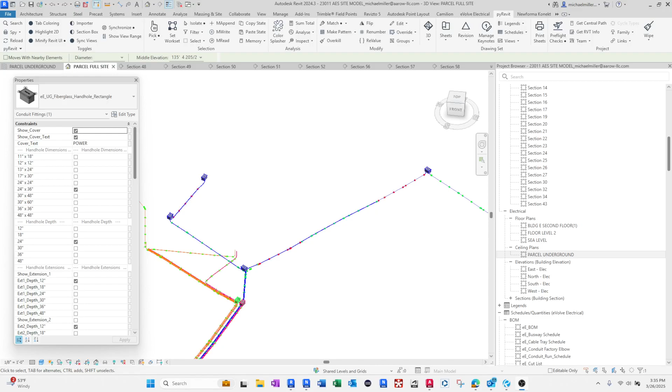Gonna make a quick recording of what we got done so far. This is the 107, 127 area. Looking at it right here.

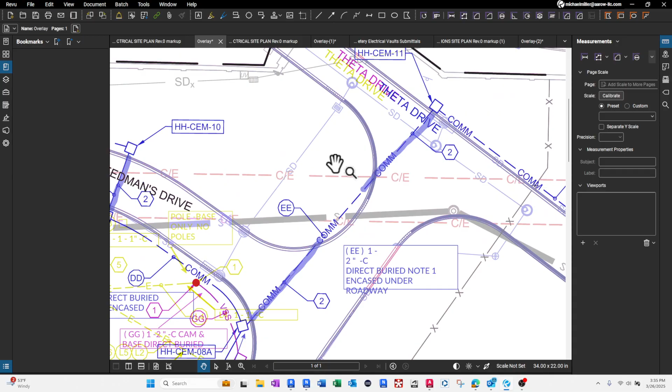This is done to this handhole, crosses here. We have this moved over to right around here, and that's because of CU.

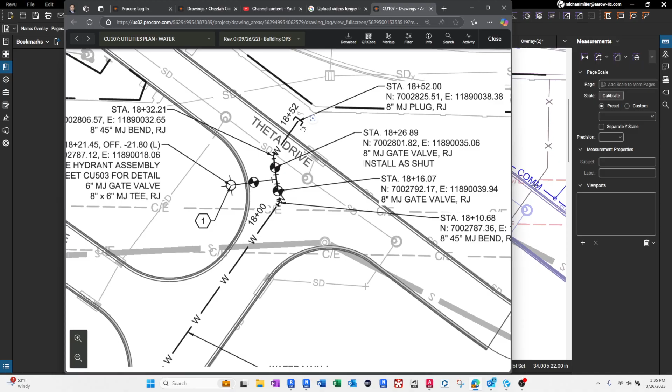In that same area, they got all this, and a fire hydrant. So that has been shifted over to right here.

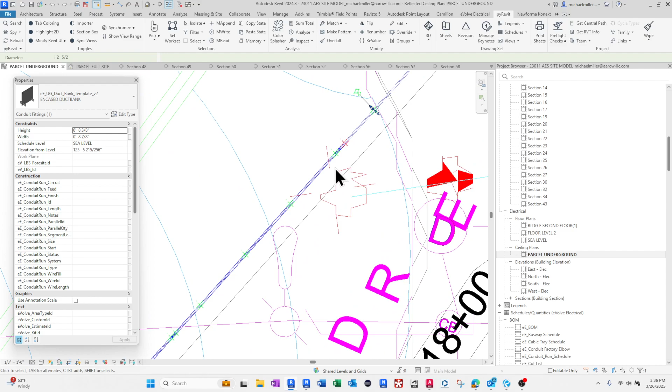Missing that. Now when it's crossing a road, it's going to be red, and then it's going to be green for direct burial. And so on there. This is back to that handhole area, so these are those handholes located here.

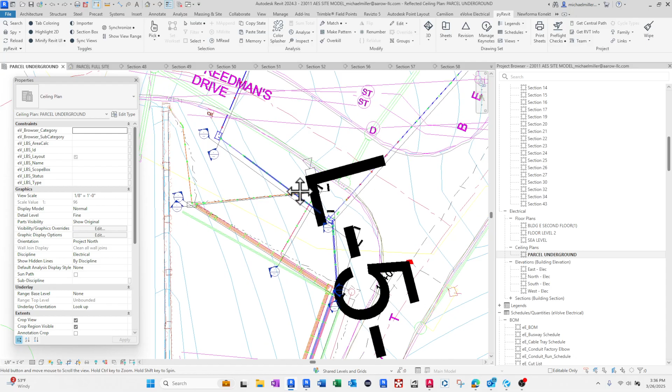Pop up. Need to finish this, actually I didn't do that. I just saw that, here. I gotta finish that right there. Here's the, can't see them.

The VSS is right here, box and the power box. This is where the panel's located. This power goes out to this camera.

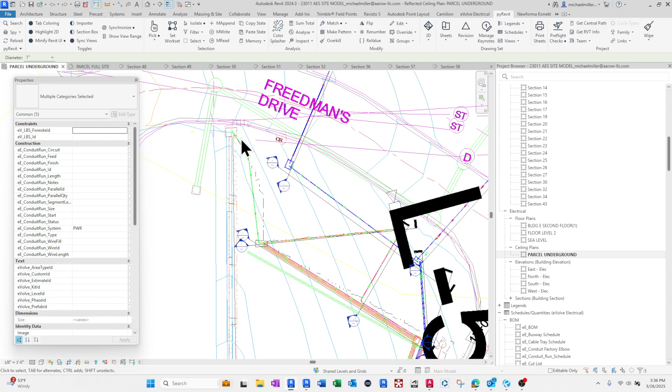Then we have this running to the camera as well for VSS, and then power over here. And then we can see that now over here. Looks like this, it's what you've been seeing already.

Come across the road twice. Up here, goes across the road, red. Handhole, powered, panel, power to security cam. VSS is magenta. If you haven't caught on yet, blue is comm, orange is power.

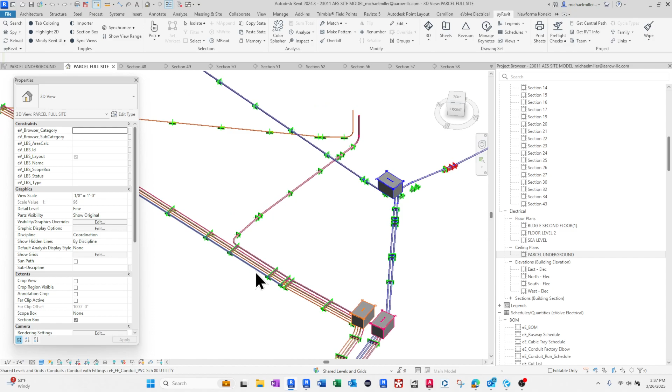It goes for the boxes too, and these are labeled power and then whatever their number is. We have green throughout here because it's direct burial.

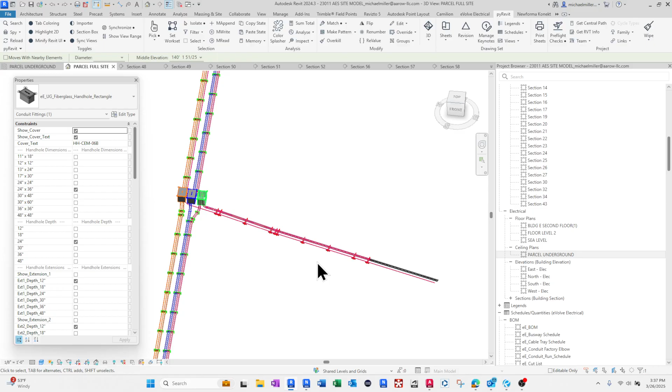These go down all the way, and they hit these. This is where some camera and power goes out, and come back. Comm just hits this and keeps rolling.

Now they don't have that shown on here like that. They have it shown coming down here and they just kind of have a mess, but I have them together and I kept them in order.

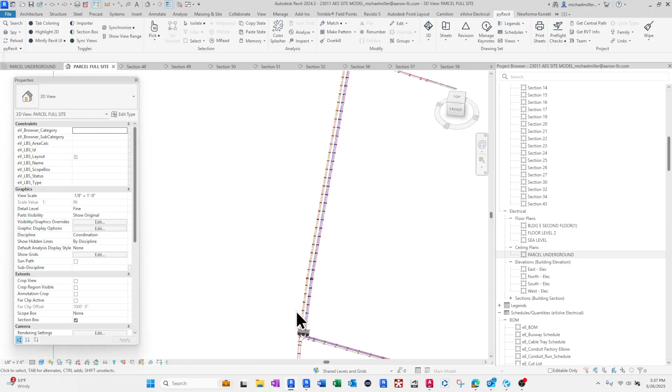And lastly, after that one, we come all the way down here again. Now we have everything going: video, comm, power, and then large 2-inch. And then we have the two 1-inch and the video feed to the security camera down here.

Right here, here's the security camera, here's the video feed, and here's the power.

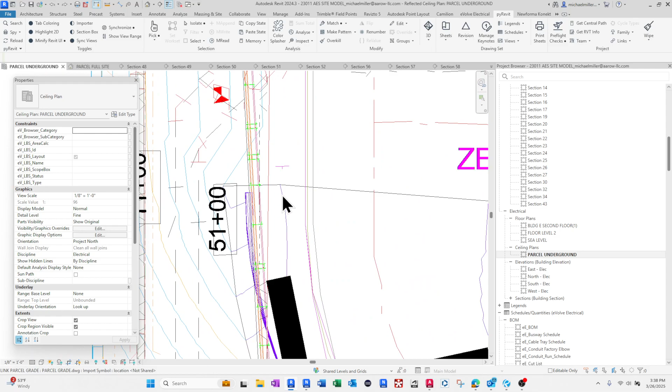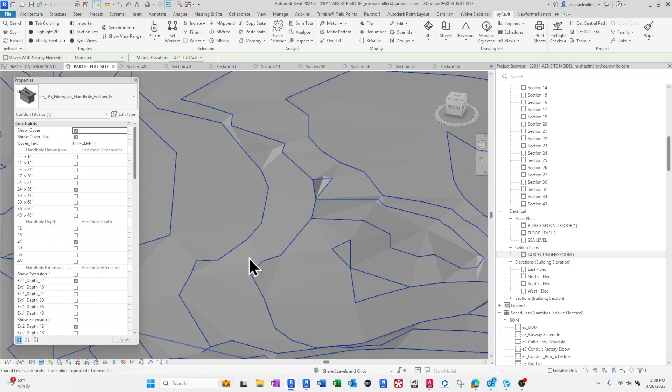Looking at that area again as a full, we can turn on the topography that we have made with the file they gave us for grade. And as you can see, handhole across the road, handhole up here, handhole comm, all comm.

Here's a stub up for power, and if I click this you'll see it underground: the comm, power, video. Here's where we came all the way down.

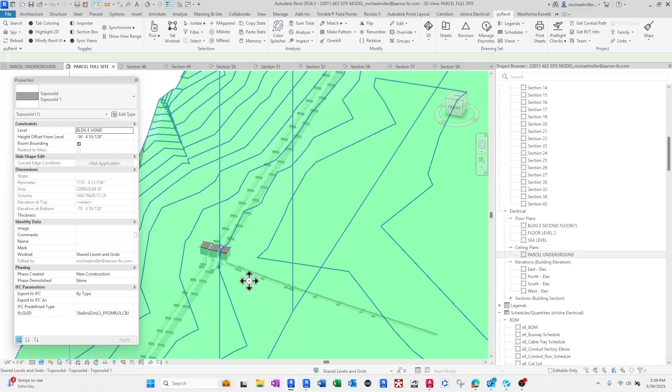Hit these handholes, cut across here, hit these handholes, comm comes out with them here, and then we have a stub up for the video, which these will get tighter, but I kept them separated with that 1 foot separation.

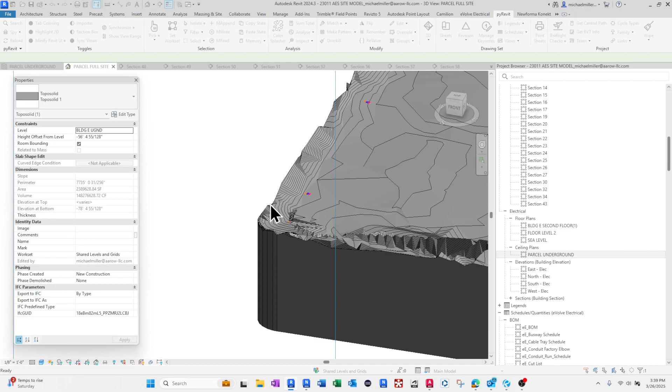I'm going to turn this off again. We'll cut across here, we have magenta for video and blue for comm. We have them coming all the way over here, hitting these.

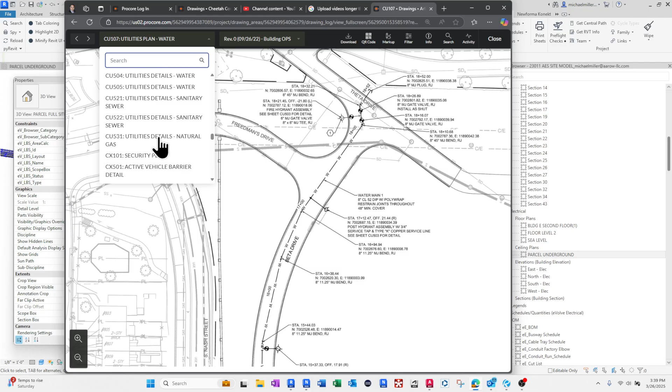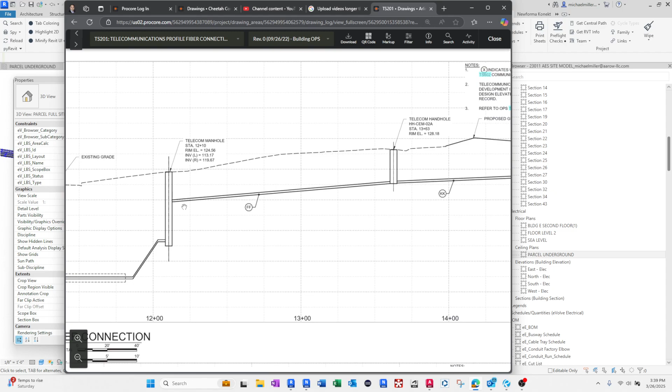Now these have actual elevations. So this is when it comes out and hits this. This is the manhole here, it looks at about 120-ish.

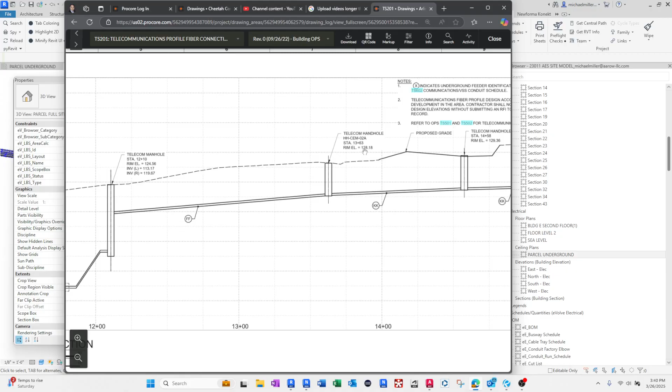And then it comes up to this handhole. It shows super deep handhole, but it's really only 2 foot deep, and it's at 128.18, just to show you. We have this at 128 foot 2, it's put in at that same thing.

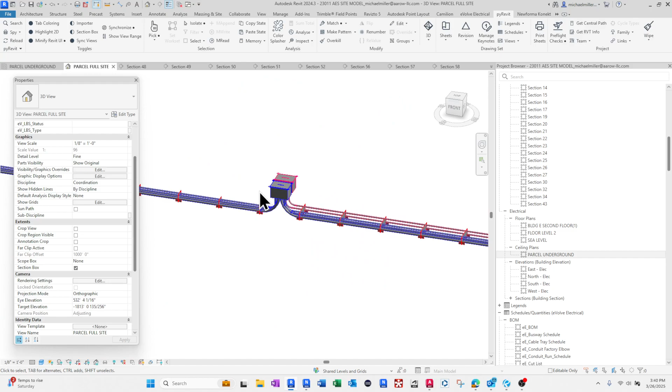Fix that. Alright, comes up here, hits those, video stays, comm keeps rolling, through here. Here we have a road. Show you that same route.

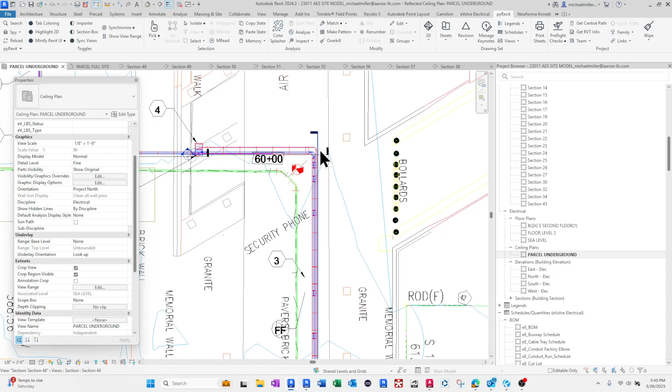Here's the monument here, here's the bollards coming through here. We wrap around, you can actually see the water pipe with this a little bit.

It gets really skewed when you try to bring CAD in here and it's a really big file like that, really far away, it just doesn't show up right. That's why it looks like this. Anyways, wrap around this corner.

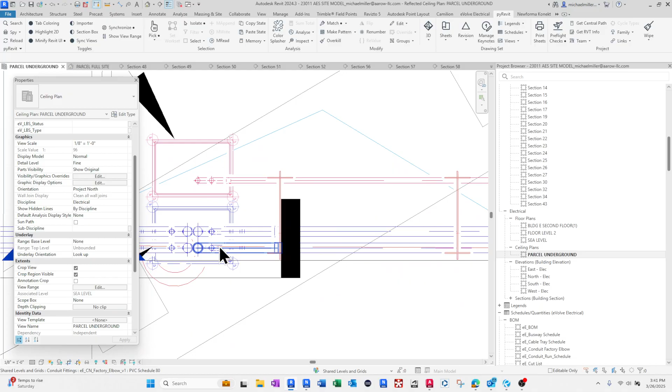Hit this, hit these, and then comm keeps on rolling, rolling up here, hits here. Follow the contract, goes over here, comes down and hits right here.

I thought about doing this straight right here, but I'm going to do what they tell me to do in the drawings because I don't know if they wanted to bring future or something through here again. So these also correspond to, there's a road right here.

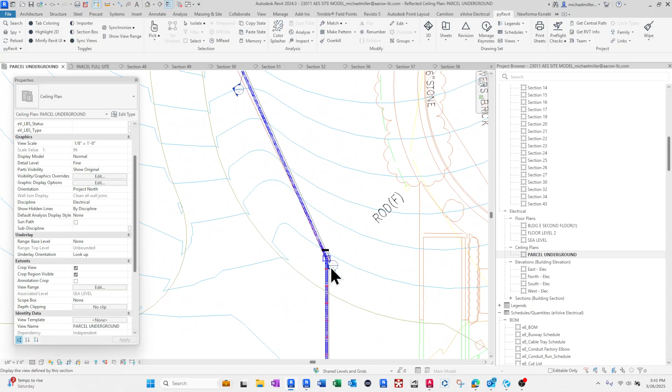Epsilon Drive comes through here. So you have the red going across for encased.

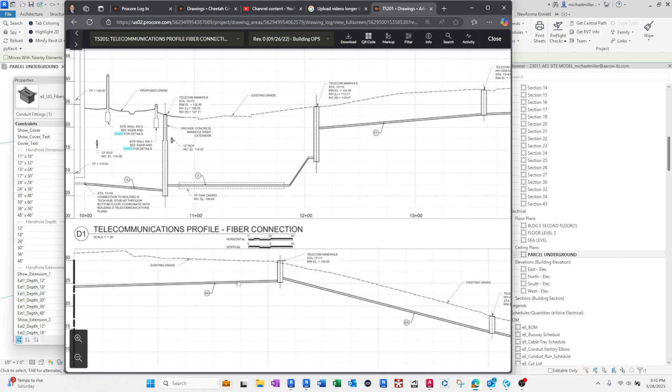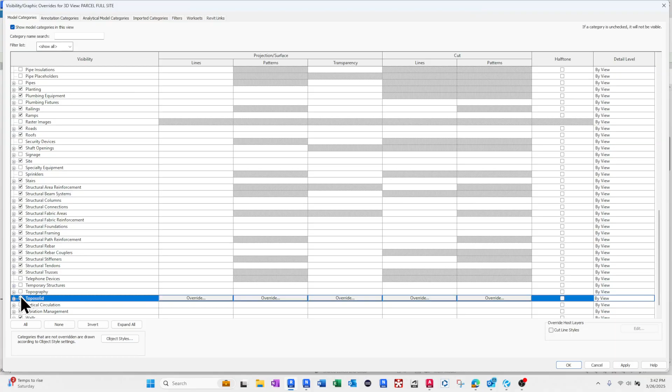This didn't have a name, but I put it as 17 plus 11 comm handhole because it was labeled so on here, 17 plus 11, and then 129.9, which it's 130 on here because if you look at this with the topography on, you will see it's barely shown. So 130 works.

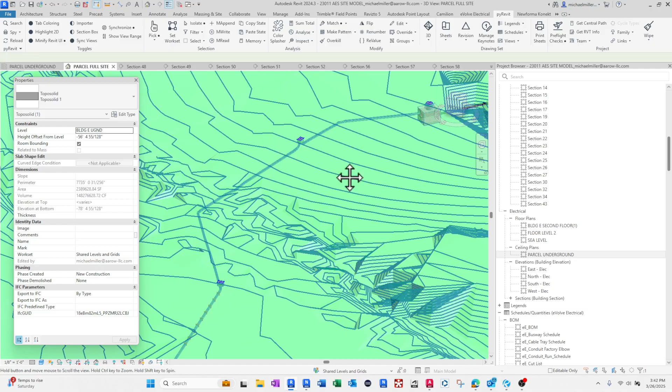As you can see, we're going from here to here next. And you see the route here. And then now we're going to here, which is the manhole. Shows us coming in top, exiting the bottom. The top, at the bottom.

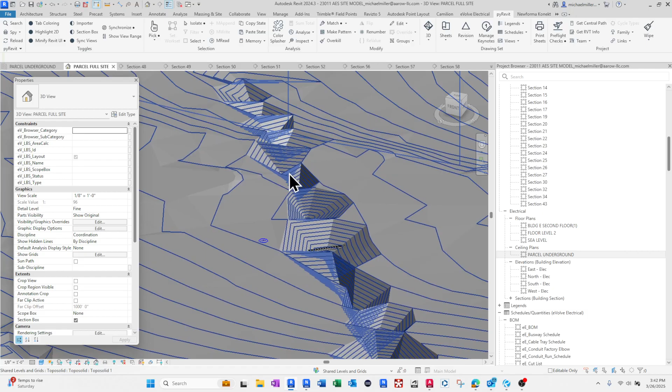I don't think these are real. I don't think they're really like this. So I'm not dipping that down for that run. As you can see, I'm coming out the bottom, but I don't think that's shown accurately.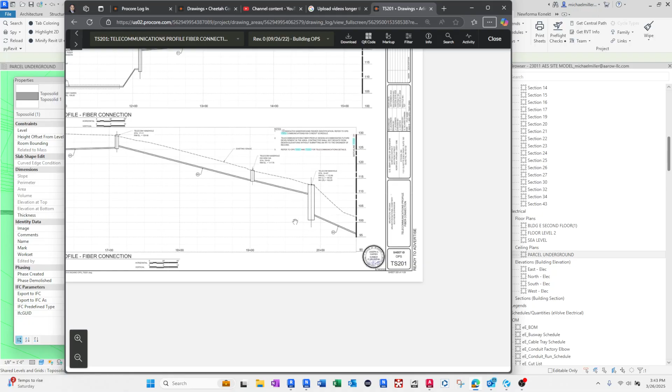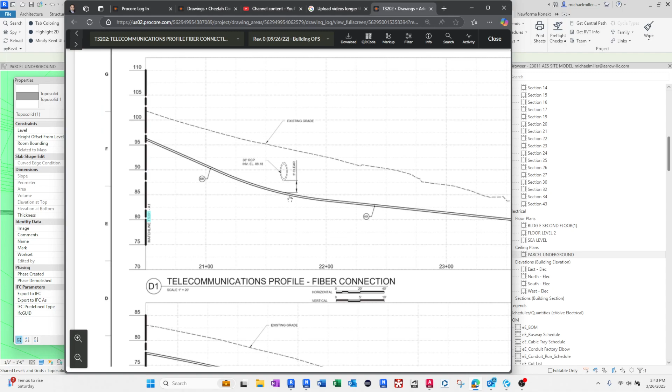This run comes downhill. Now this looks funky, agreed. But if you look at this next run here, this shows us coming downhill and finding a point at 88.18. So it looks like we need to be at like 85 to the top.

So that's a pretty big dip because we're not going to dig that deep this whole way. So our run more looks like this and then dips down and then back up. So that's what that is, which you can see here.

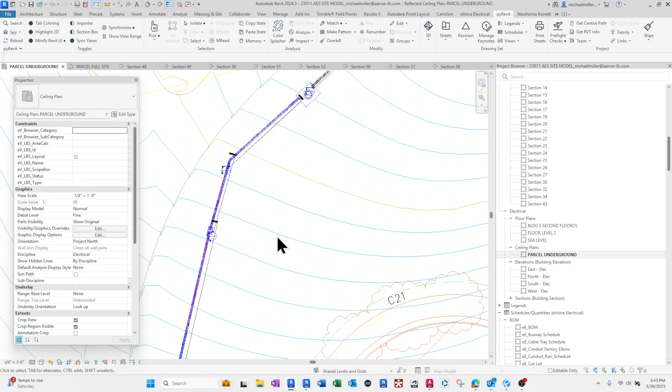And my guess to where that is, this run right here. This crossing. As you can see here. I don't know where that is actually.

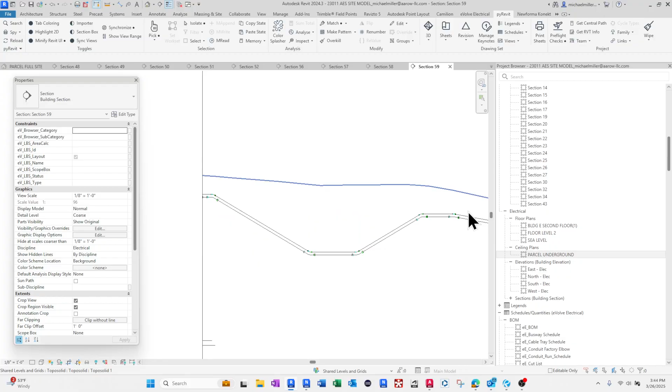Dip, back up. Can't go above it, it'll be too high. See, at the top we have it at almost 85 foot. So that keeps us definitely clear, as I'm using this dotted line as reference, 85. So we're going to take a dip right here and back up.

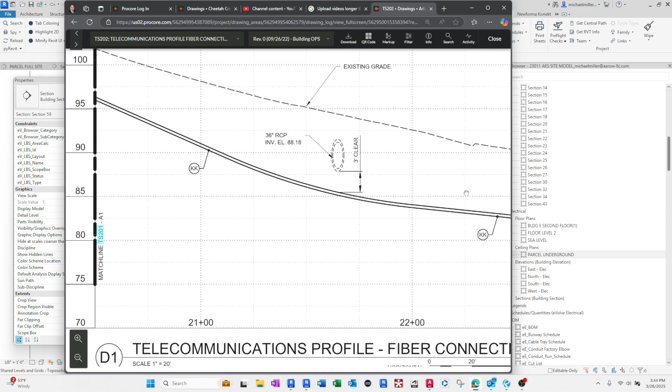Going on to telecom handhole CEM 27, 86.82, which is around 9 inches. I gotta hurry up, run out of video time.

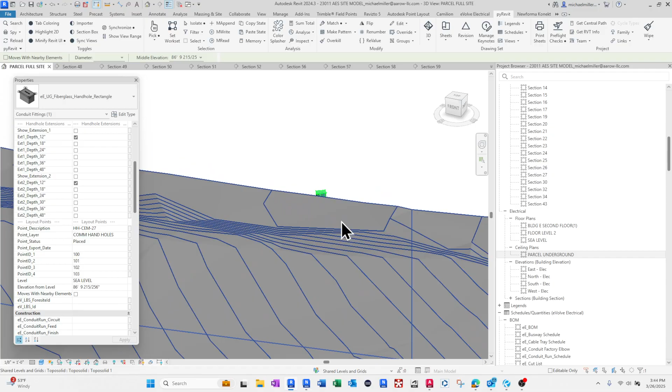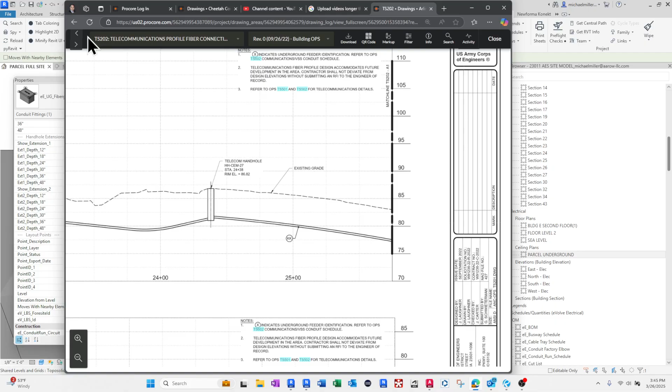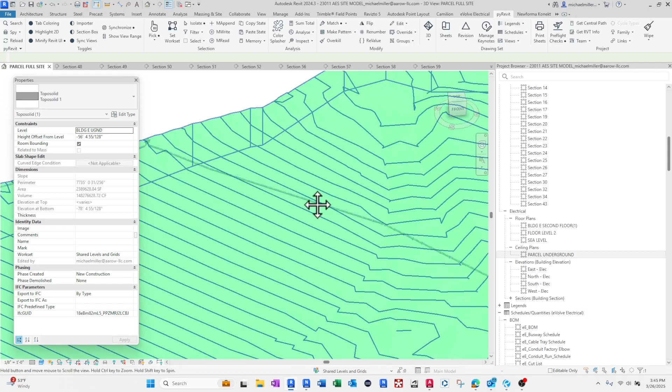As you can see, it's not sticking up above the ground at all. And that is because if you look at the CAD drawing here, we do have it telling us HH4A6. This is from their drawing, telling us where it is.

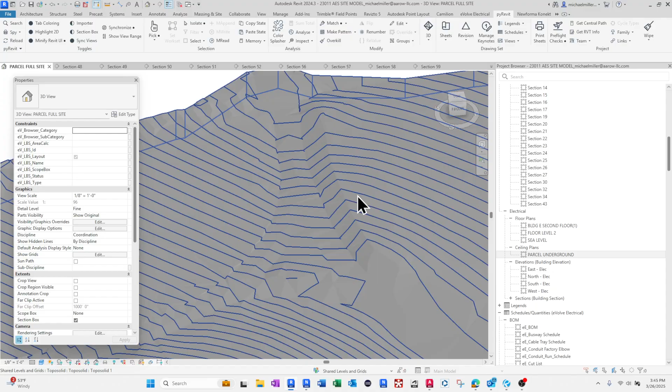I have that labeled HH4A6. We're at 56 and 11 inches, which theirs is 56.95, so that's about right.

But if we go on here, the grade line before it, south of it, is 69. Grade line above it is 68. So that's like almost 10 feet above what they've given us. But anyways, crosses the road here.

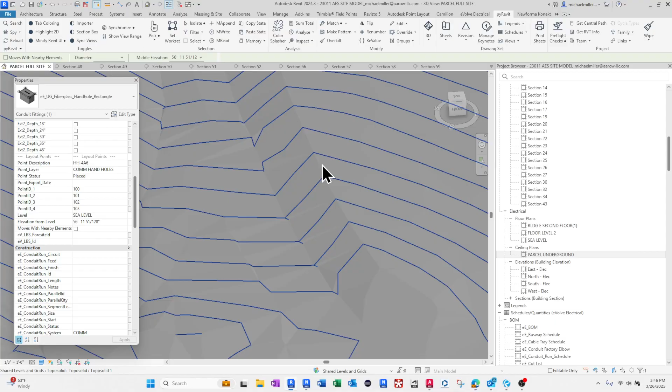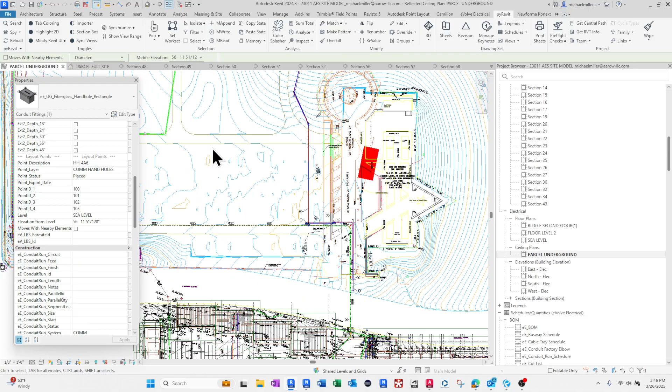Across the road here, I have it encased. That'll be marked as such. Comes out, it turns out, finishes there. So that is the full run so far. I will have that point layout here shortly, and I will, I guess, put all these.

You can see it's coming out. This is gonna move over. It's about right here. You can see all the sections that I have open.

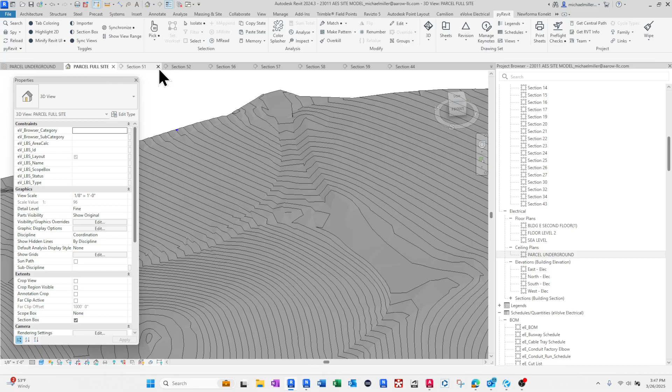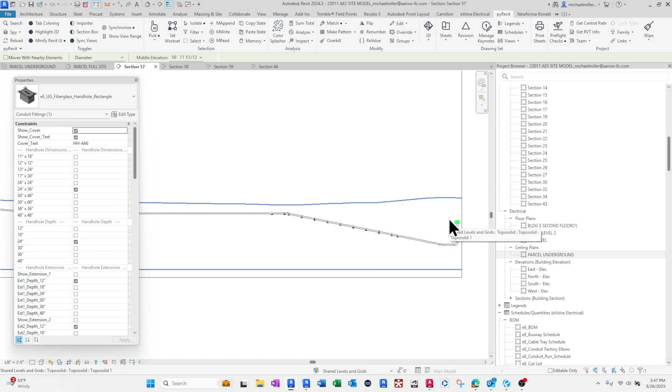But they'll have all the layouts showing you what we're doing for each. This is the existing HH4A6. This is the existing here, showing you the difference in height that it's going to be. Pretty crazy. So I don't know what's going on there.

Might need to be an RFI, and you can pause this video and take it and take pictures or whatever.

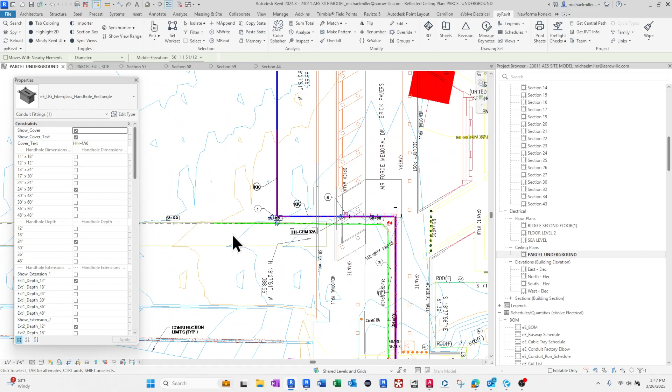Yep, so this will all be laid out, conduit blue. Red is encased. I'll get this drawing out tomorrow. And then I'll get all the sections done as well.

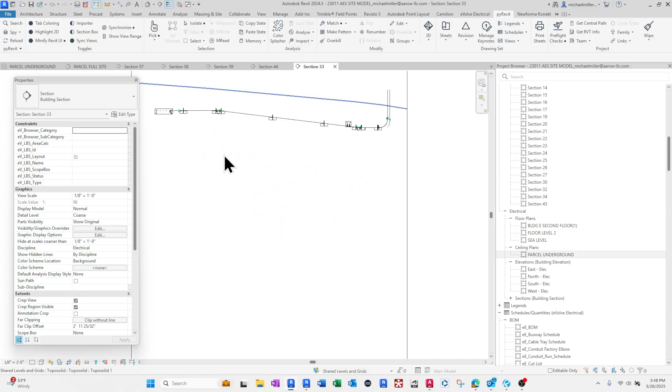Just looking at a few here. Now this is existing storm, and it's not even in that same spot, but it comes down here. Here's a turn up for the secure, or this handhole here, and then this for the cameras right here. So yeah, we got everything in here.

And about ready to go. So I'm gonna put points on this tomorrow and make drawings.